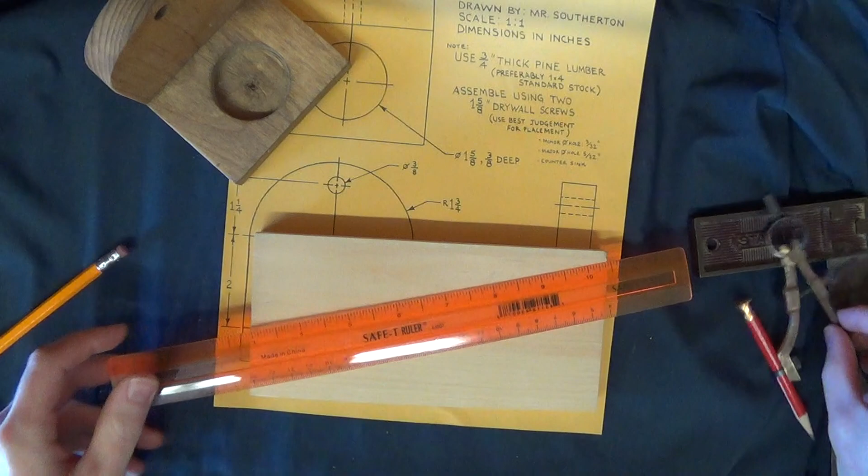You will need your block of wood, your drawing, a ruler, compass, pencil, and tri-square. Here is an example candle holder for you to look at. The orthographic drawing contains all the information you need to build this and do the layout.

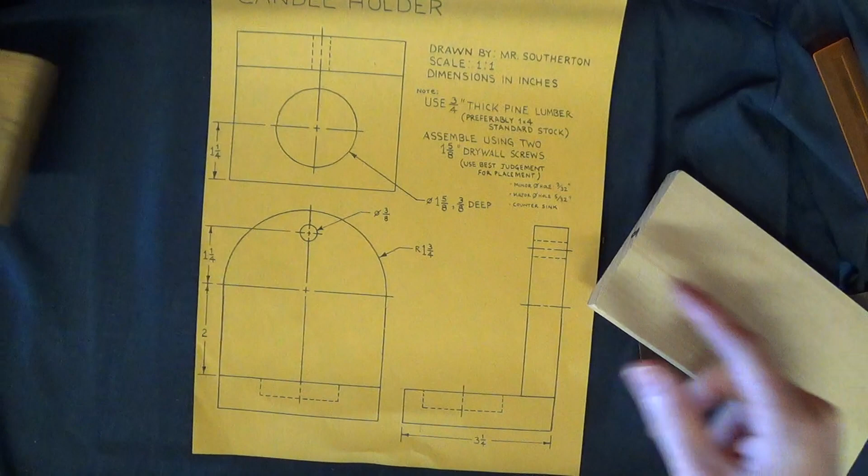First I'm going to do the bottom part, the part with the hole in it. The drawing tells you that the bottom part is 3 1/4 inches, so I'll measure 3 1/4 inches, put a mark perpendicular to the ruler, take the tri-square, make sure the edge is flush, and draw a line all the way across. Make sure you do your layout lightly - I'm doing mine darker so you can see.

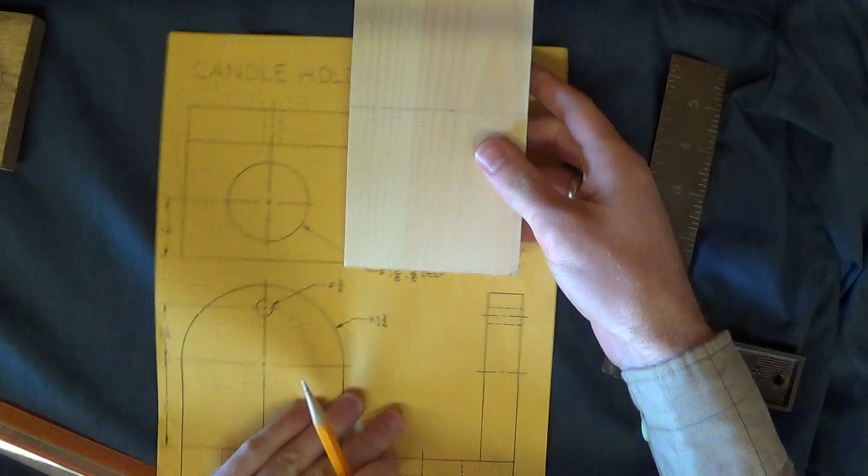Next, I want to locate where this hole is. The drawing tells me it's 1 1/4 inches away from the bottom edge, so I measure up 1 1/4 inches, put a mark perpendicular, and draw a line across. It doesn't have to go all the way across.

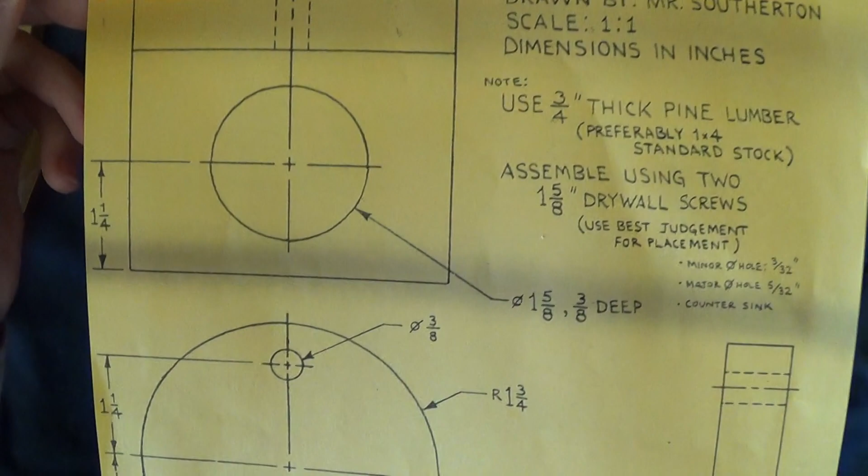Now I want to find the center. This is kind of interesting - the center of this hole is in line with the center of the curve in the back. In the front view you can see that the radius of this curve is 1 3/4.

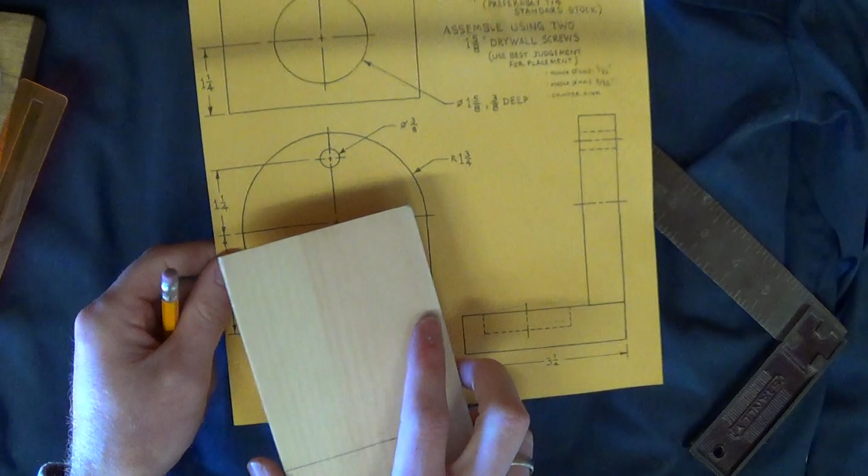There's the center - from the center to the edge is 1 3/4. This block of wood should be 3 1/2 inches wide, and half of 3 1/2 is 1 3/4, so we basically want to find the dead center here.

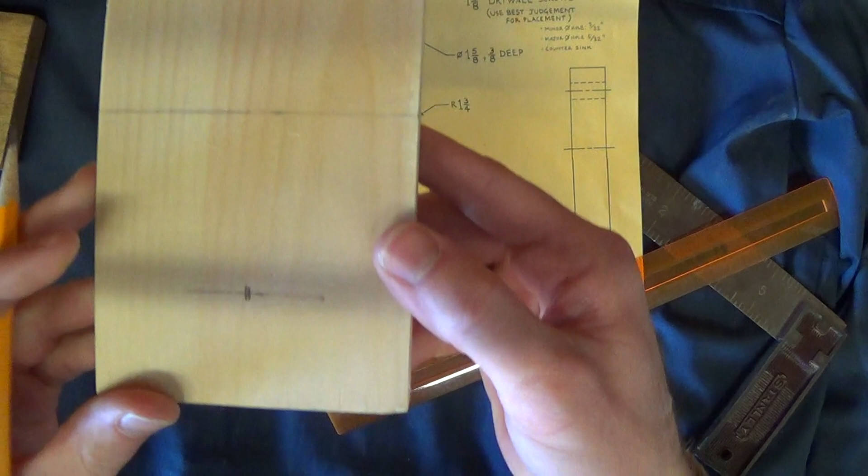I'm going to measure 1 3/4 over and put a mark. Just to play it safe, to make sure that's the center, I'll measure 1 3/4 from the left side as well. There's my mark - you'll notice there are 2 marks there. The dead center is going to be in the middle of those 2 marks. If the board was exactly 3 1/2 inches, those would have overlapped. Anyway, dead center is right here.

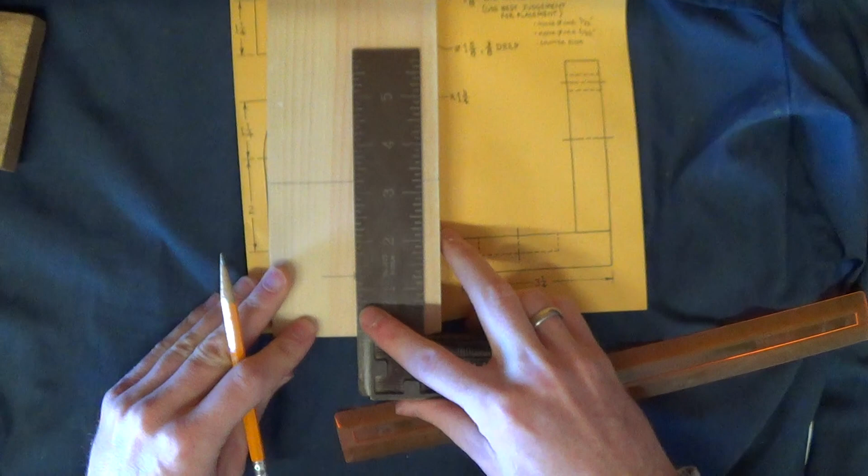I'm going to take my tri-square and make a line all the way up through this block of wood, making the line in between those 2 marks. So this is where I'll drill that hole - I'm just going to label that. The diameter here is going to be 1 5/8 of an inch.

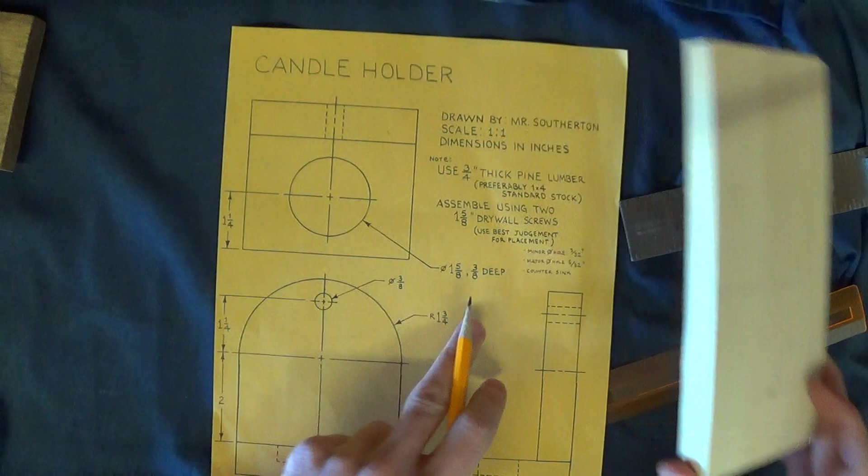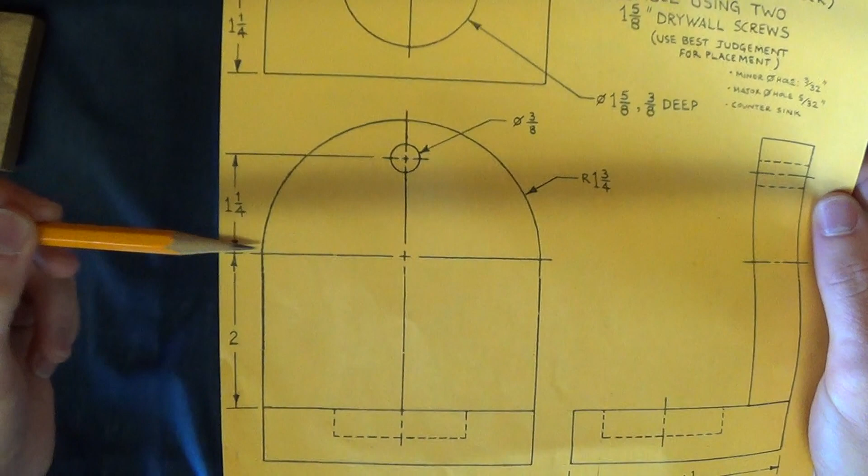Next, we're going to do the top part. This block of wood is going to become the top part. If I look at the drawing, from the bottom edge of the top part to the center of the curve is 2 inches. So I'll measure up 2 inches, put a mark perpendicular to the ruler.

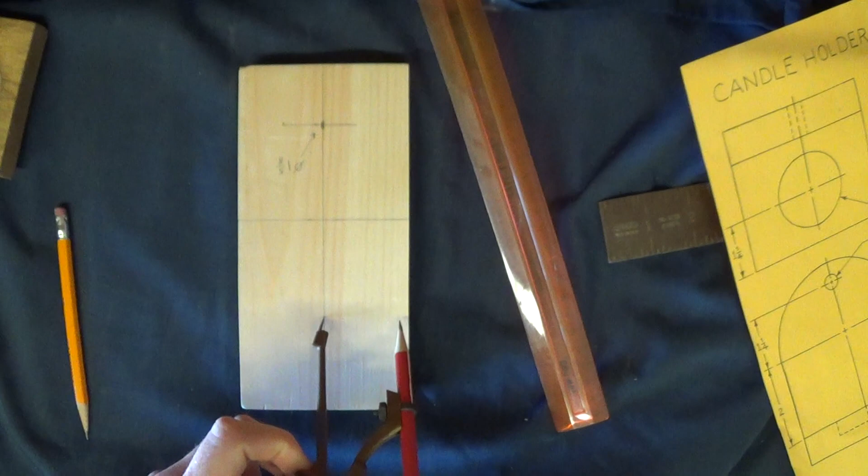I'm going to take my compass, and I'm going to make sure not to push down too hard in the wood, but set that down. I'll adjust the compass radius until it goes to the edge, and then I can draw the curve. You know what? Looks like that ended up not being quite in the center - let me remeasure this.

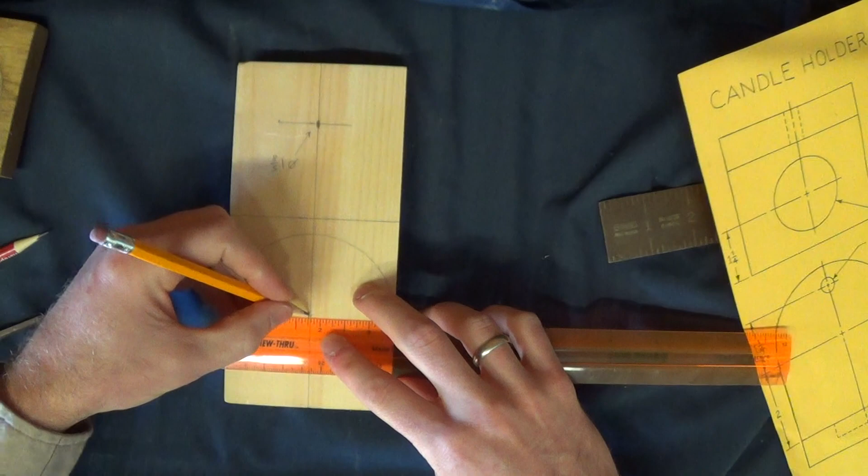So 1 3/4 from the right side gives me a mark right here, and 1 3/4 from the other side gives me a mark right here. So it looks like I wasn't quite dead center. Let me erase this line. There's the dead center - that looks much better.

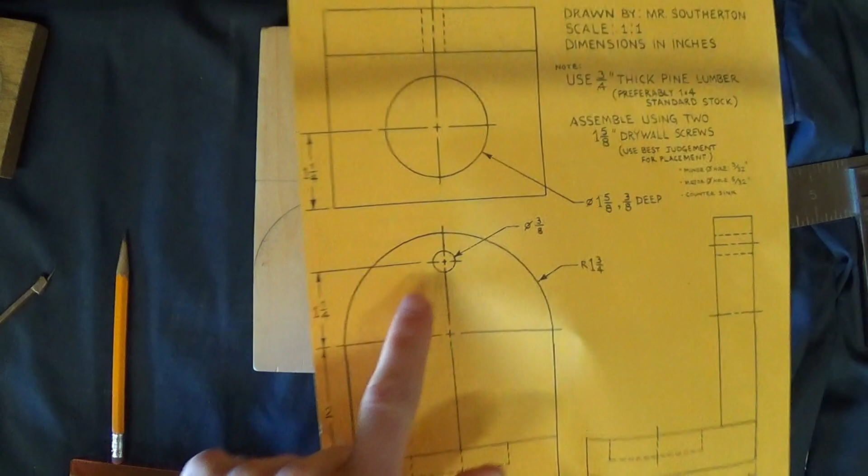Last thing I need to do is figure out where I'm going to drill this hole. I'll notice it's 1 1/4 inches up from the center line, so I'll measure up 1 1/4 inches, put a mark, and right there is where I'm going to drill that hole, which has a diameter of 3/8.

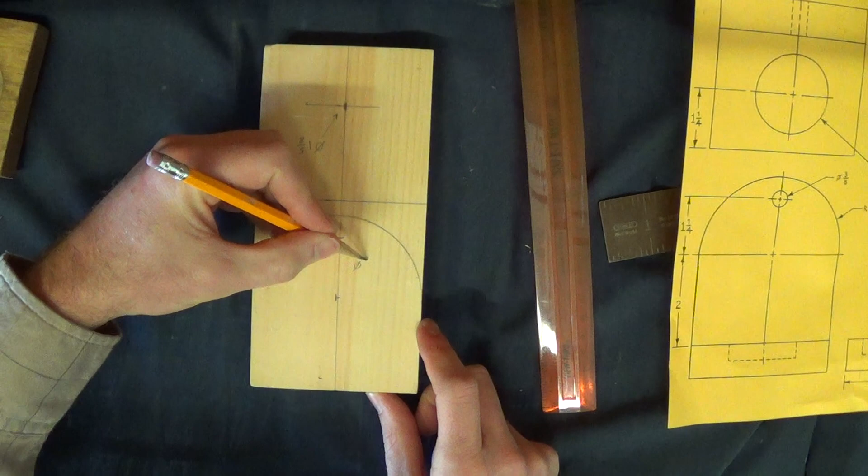So anyways, that's the layout. Good luck.